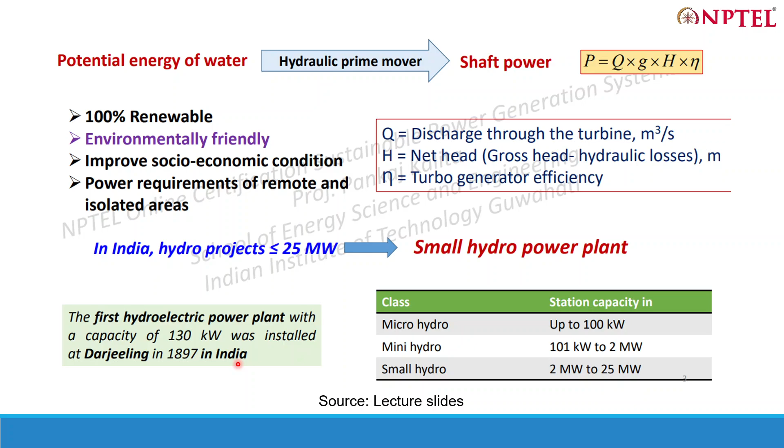Okay. So the first hydroelectric power plant, with a capacity of 130 kilowatt, was installed at Darjeeling in India. Darjeeling is a hill station in West Bengal. There you have a flow of water, so you can always build a hydroelectric power plant there to capture that flow and convert it to electricity. So, if you have any questions regarding this.

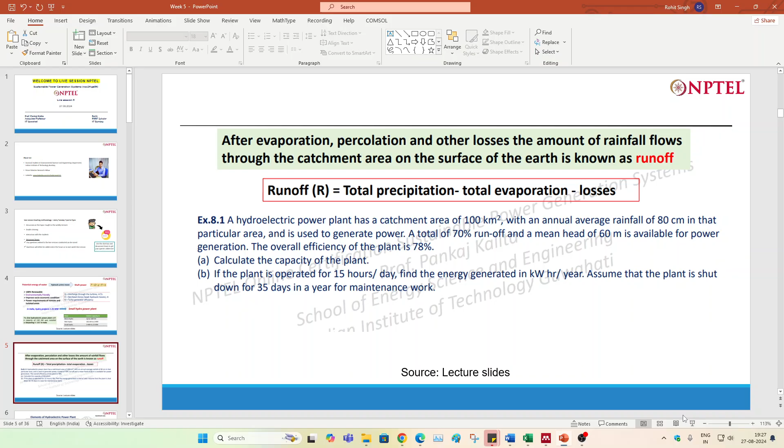So you need to understand that you have a catchment area of 100 kilometers square. This is in kilometers, so you need to convert it into meter square. And there is an annual average rainfall of 80 centimeters, so that also has to be converted to meters.

And then head is given, so you can easily calculate the capacity and total runoff. Total runoff will be this into this, and this is the actual precipitation, but only runoff is 70%; 30% is actually lost, like evaporation or other losses. So you calculate the water available for power generation.

So you must know why these extra zeros are there, to convert it into meter square, and then you multiply it with 80 by 100, that is also in meters, and then you multiply it with the runoff, 0.7. So you will get the value of q.

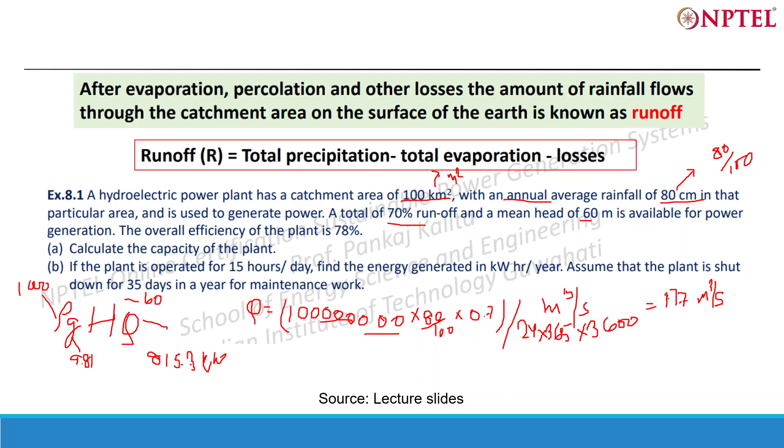Okay, that comes out to be around 815.3 kilowatt. Okay, so this is the capacity. Now the plant is operated for 15 hours per day. Find the energy. Assume the plant is shut down for, so in total the days of operation is 365 minus 35. This is the total days of operation of the plant,

and kilowatt is the power generated, and then you have to multiply it to get kilowatt hours, so 15 hours per day. So that comes out to be around 4.03 into 10 to the power 6 kilowatt hour. That is, this much amount of electricity will be produced if you have this condition.

A hydroelectric power plant has a catchment area of 100 kilometers square with an average annual rainfall of 80 centimeter. So this is quite a big unit, like 10 to the power 6, millions of units of electricity will be produced from this hydroelectric power plant. So this is the capacity of the power plant. So you can imagine the amount of electricity that can be produced annually. Okay, should I go ahead, or are there any questions regarding this?

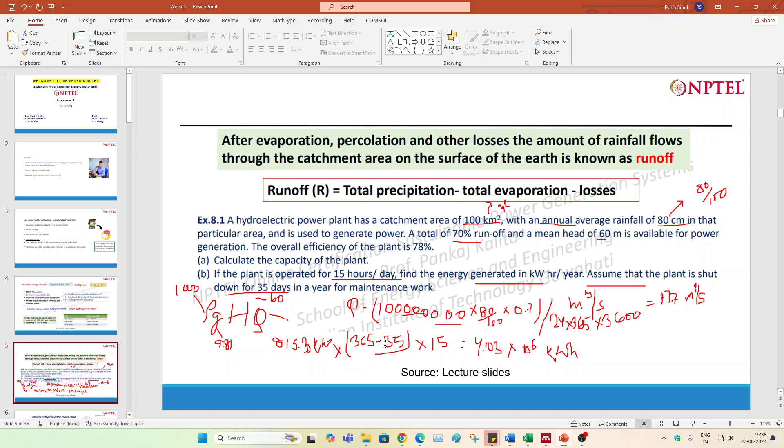And okay, so that's why I want you guys to actually have an approach to solving the numericals. What I see is that people generally don't go for the numericals in the assignment questions. They can look difficult, but these are not difficult. These are basically questions based on the basic concepts which you learn in the slides. Okay. Now moving to the elements of a hydroelectric power plant.

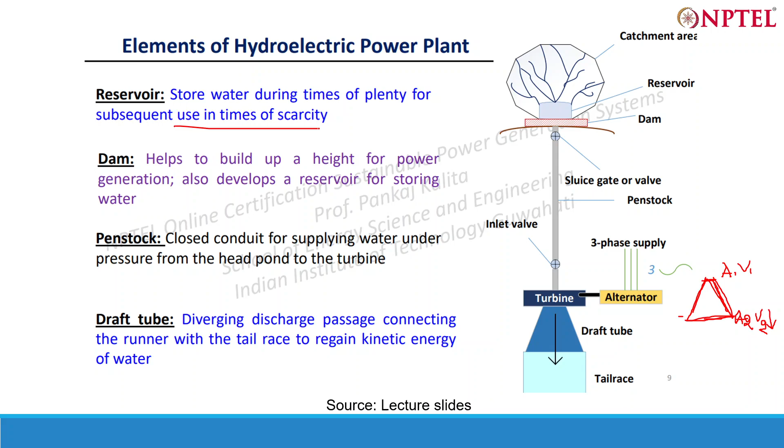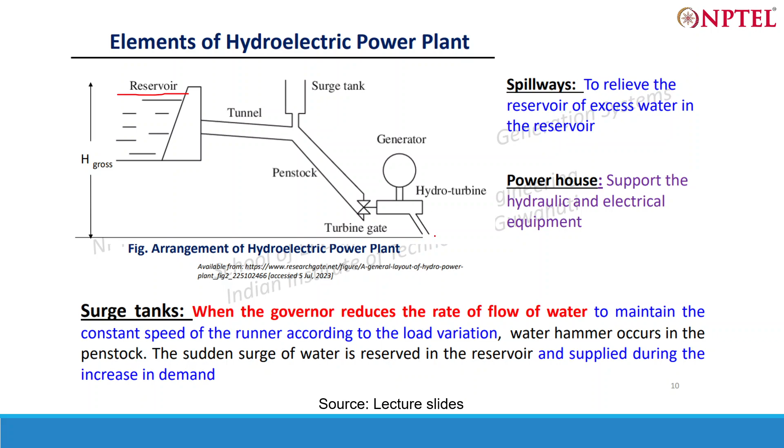This level is the headrace level. The water level here, and then there is a tail race here. So that has to be measured. This gross head is basically the difference between the headrace level here and the tail race level.

Net head is basically the head available at the inlet of the turbine. So it's Hg, the gross head, minus whatever losses are there, which have to be subtracted. The losses are given by FLV, FLV squared upon 2GD, that is flow through the penstock and other things, so that has to be taken into account.

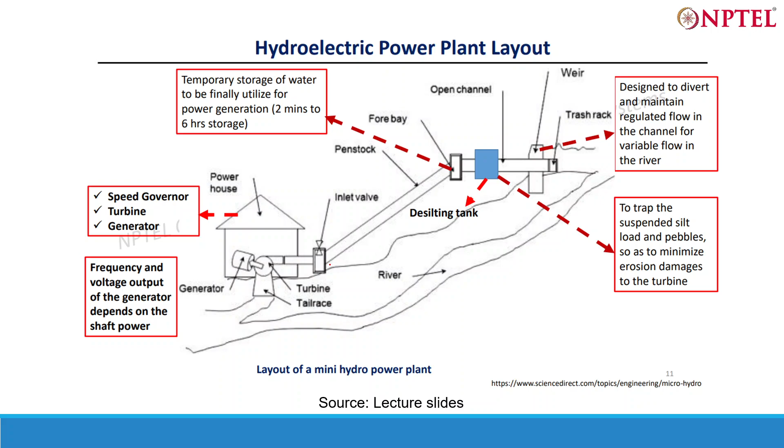Hydraulic efficiency is runner power by water power. Runner power is whatever power the turbine produces, and comparing it to whatever power the water gives gives the hydraulic efficiency. There are different types of efficiency in the hydroelectric power plant, so always try to understand which efficiency is being talked about. If no efficiency term is specified, take it as overall efficiency.

Mechanical efficiency is shaft power by runner power. So whatever power is generated by the runner, versus whatever is available at the shaft.

Volumetric efficiency is the volume of water actually striking the runner divided by the volume of water supplied to the jet. We'll see what this means in the later slides. Overall efficiency is basically shaft power generated, generator power, divided by water power. If you multiply ηh into ηm into ηv, you get the overall efficiency. You can also get it from here.

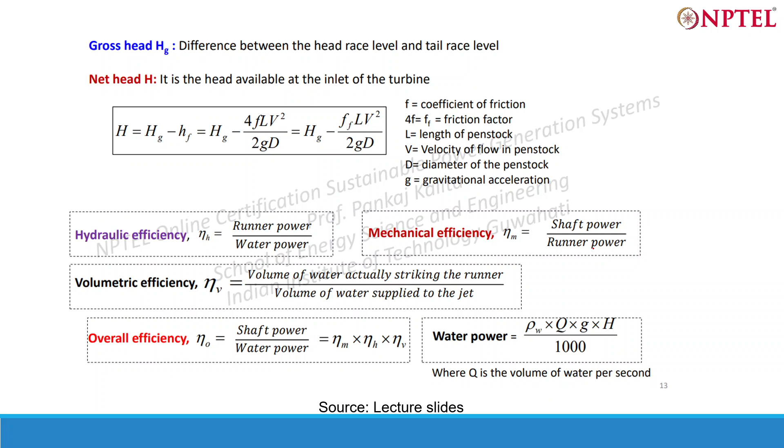Water power is basically rho g H Q, which we solved in the numerical, divided by thousand to get it in kilowatts. So solve this question. I want you guys to solve this question. Then we'll move to turbines, and then another question.

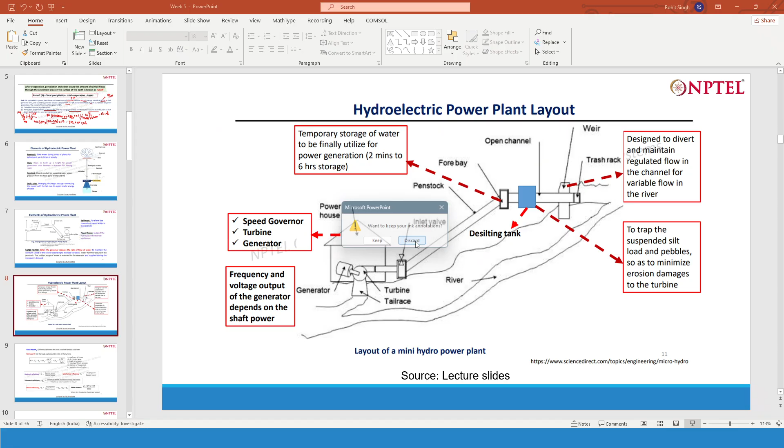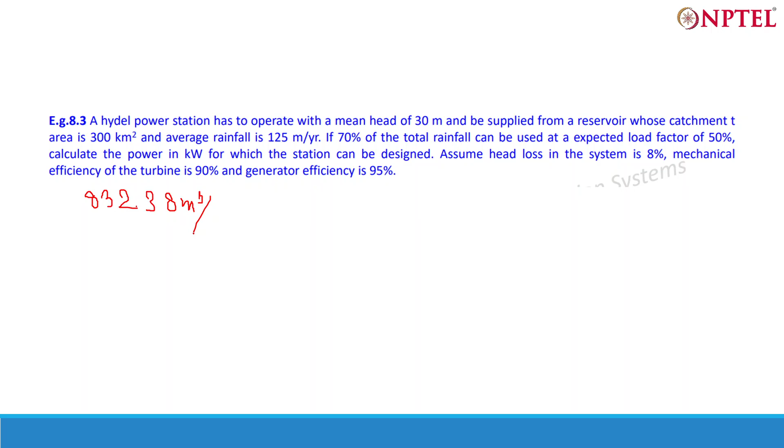So if you know the discharge, then I think everything is known. You have the load factor here, you have the head here. So rho G H Q into this load factor gives power in kilowatt — this has to be divided by 1000 for power in kilowatt. Assume head loss in the system is 8%, so it's 1 minus head loss, HL I can say. And then mechanical efficiency of the turbine is ηm and generator efficiency is ηg. Now just put the values and get the answer.

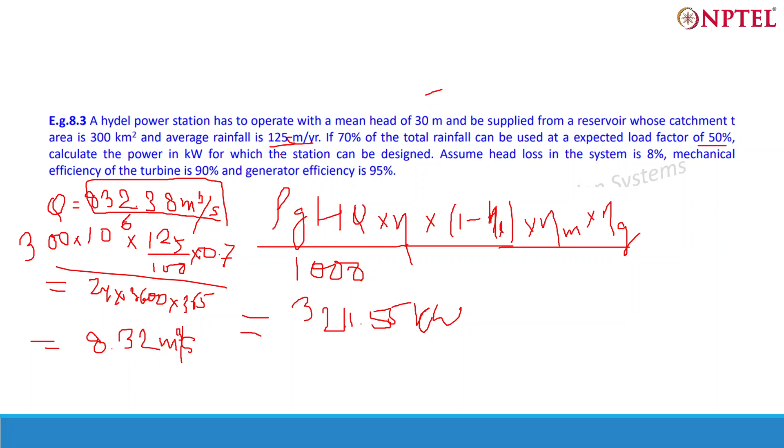Oh, they have made a mistake here actually. This is centimeter — 125 meter per year is quite a high rainfall, this should be centimeter. That's why I divided it by 100. This is centimeter, 125 centimeter. This is a wrong value in the question — 125 meters of rainfall is impossible. Rainfall throughout the year is generally measured in mm. Even 80 centimeter, 125 centimeter rainfall is quite high. Generally rainfall is like 1100 mm or something in a season, so in a year it can be 80, 100 centimeter or something. So yeah, this is centimeter.

Then rho G H Q — you have to multiply all these values to get the overall efficiency, and divide by the load factor here. This is overall — η overall is basically this into this, so this is not overall, this is head loss. The actual efficiency is 1 minus 8%, that is 0.92. So that will be the correct answer, 0.92. Okay, so is it done?

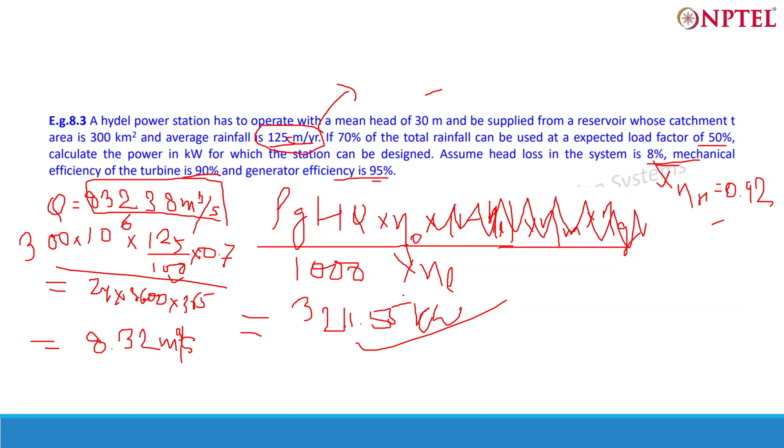Okay, then impulse turbine. I want you to have a look at whatever has been taught in this interaction session up to this point. If there are any questions, please feel free to ask so that we can have a good discussion. You guys can go through these slides and see if there's anything you want to ask, or any numerical questions that are quite difficult and can't be solved by you. So you can always ask. Till then.

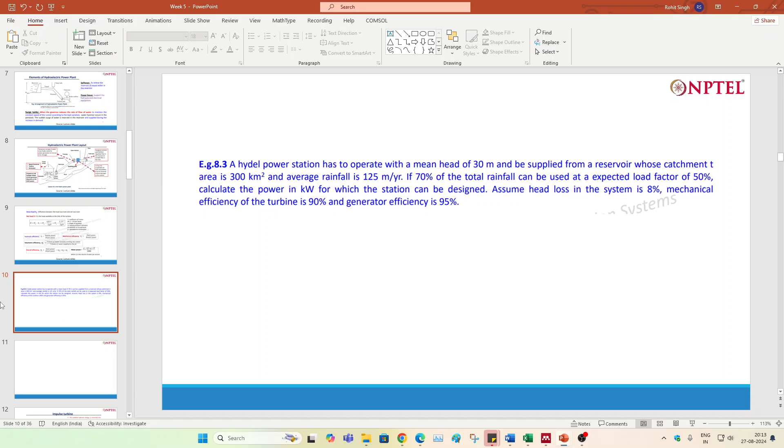I'm sure you guys must be getting the idea about how to approach and solve these types of questions, so most probably you'll be able to do the questions in the assignment. I think I should go directly to the quiz questions of the last run so you can have a good understanding, and if time permits I'll come back to the theory portion. Not much theory is left actually. What I wanted is, only impulse and design a Pelton wheel. You can do this question at home, design a Pelton wheel.

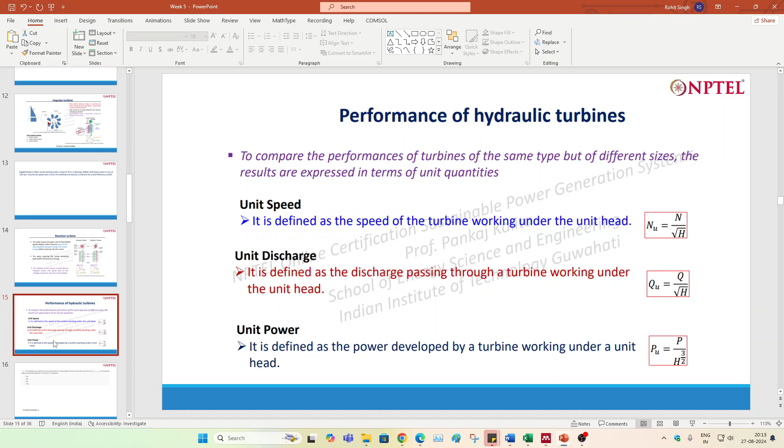Okay, so performance, now we'll go to quiz questions. These are very easy questions compared to whatever we just solved, so I want you guys to not miss any of these. I think this is a numerical question, just a numerical question. Let's move to this, let's remove this diagram. Actually this is from the previous wind turbine.

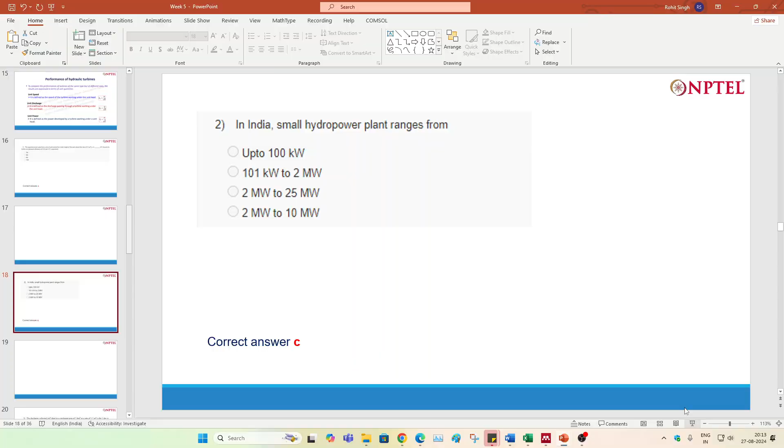In India, you should answer these questions. Small hydropower plant ranges... remember the first slide which I taught you guys, it ranges from 2 megawatt to 25 megawatts. So the correct answer is answer C.

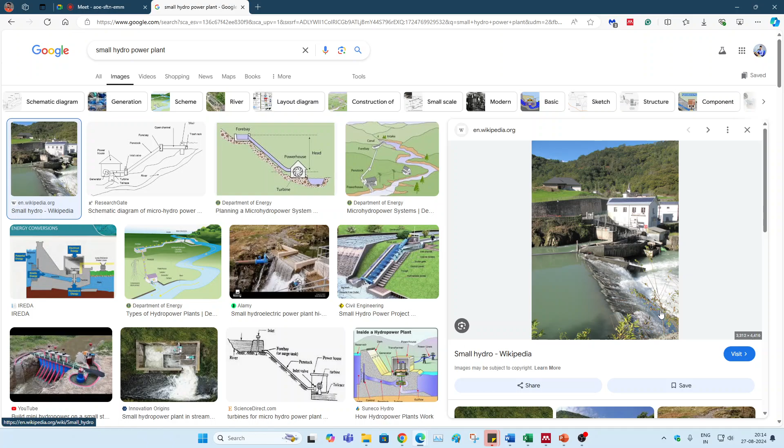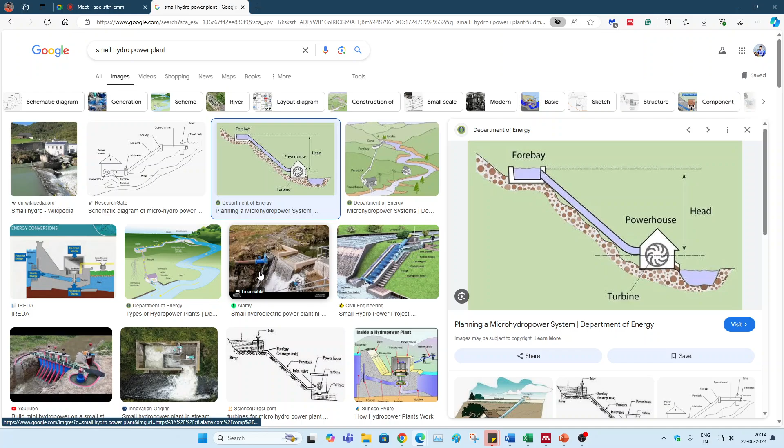Let me check if I can show you guys how small power plants actually look like. Small hydropower power plant. Okay, so do we have a small power plant here? This is a forebay powerhouse, so yeah, the forebay looks like this. The flow, the temporary reservoir is there, this is the penstock and this is the powerhouse. Okay, got it, this is one of a small hydroelectric power plant.

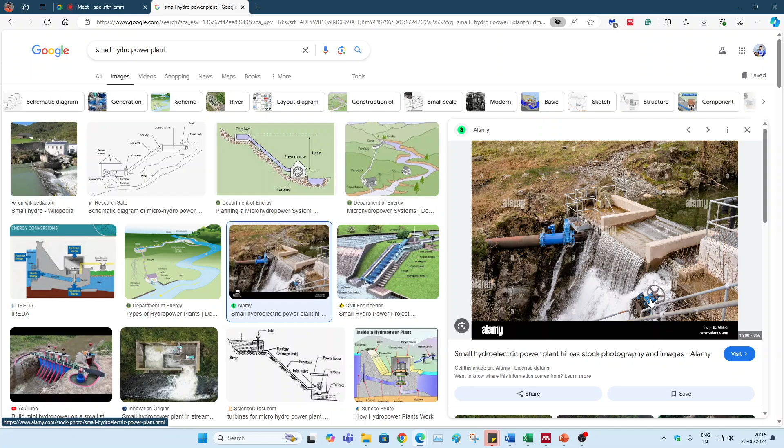So you can see this is not like a very big dam or something, not like what you see in Tehri Dam, Farakka Barrage, or in South you can see various big dams like Hirakud Dam, dam on Godavari, Narmada, Sardar Sarovar. These are very small, so they can be used to produce electricity. This is one example, kind of a front view of these small hydroelectric power plants.

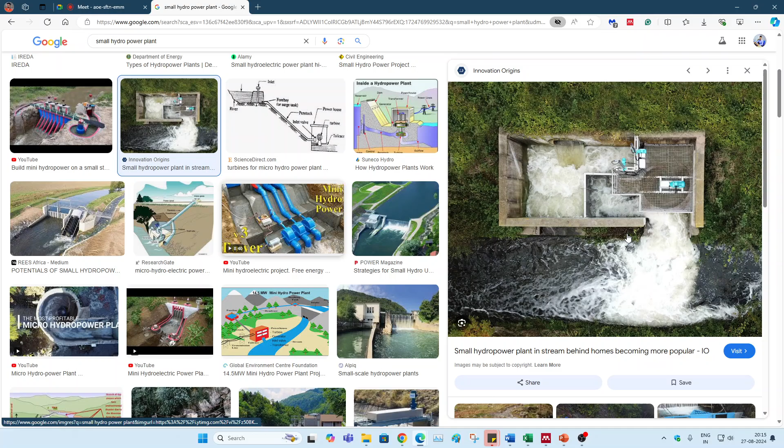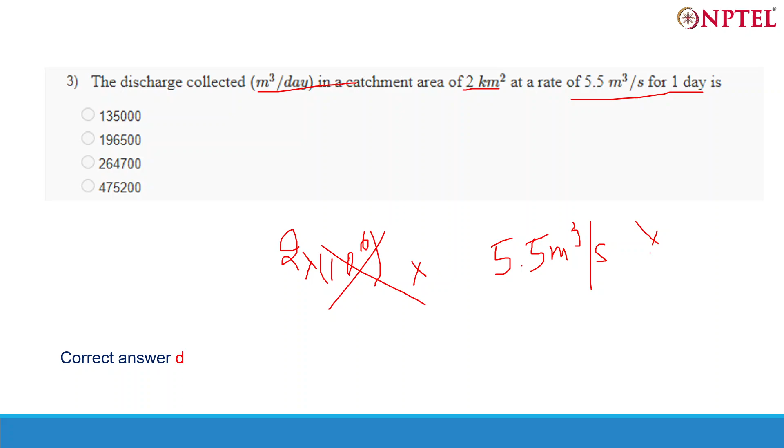I think you guys will be able to do this question, so let me do it for you. Discharge collected for... you have meter cube per day, discharge 2 kilometer area, so you need to convert it to meter square, 2 into 10 to power 6. But I think this is given for 1 day, so I think this is not needed actually. Discharge itself is given as 5.5 meters cube per second, so you have to collect it for 1 day, multiply it by 24 into 3600, not into 365, just 1 day. So 5.5... this gives 472500, okay, 475200. So this is the correct answer.

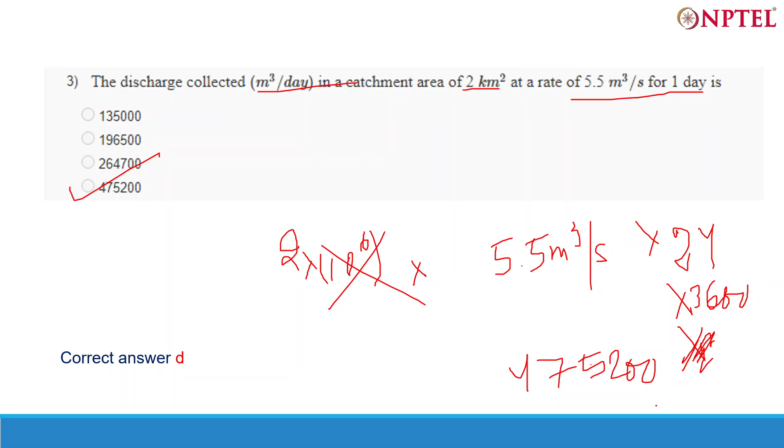Cavitation occurs when the pressure of the turbine is higher than atmospheric pressure - wrong. Water in the turbine leaks due to pressure difference - wrong. The pressure of water falls below vapor pressure in the turbine - this is correct. So the reason cavitation happens: it's a phenomenon that occurs when pressure falls below vapor pressure, so bubbles are formed, vapor bubbles are formed. These bubbles travel through water, and when they strike a high pressure zone like near the turbine or a solid surface, these bubbles actually get broken down. So whatever vapor pressure is released does have an impact on the turbine blades.

So erosion of turbine blades can be there. That actually has a very negative effect on the performance of the turbine also. So these cavitations should be avoided. Apart from that, it makes the turbine blade unable to operate freely or efficiently. So these turbine blades have to be changed actually.

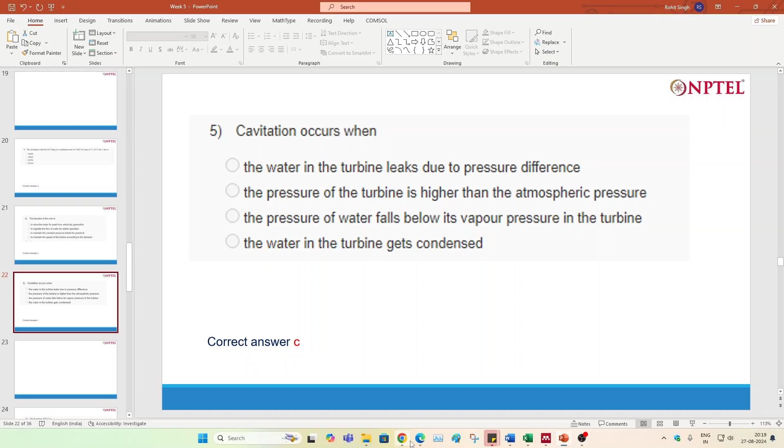So that's why we have a lot of studies, a lot of research going on to prevent this cavitation in hydroelectric. Not only is cavitation a problem in hydroelectric, but also in steam power plants. Cavitation is a big problem. So one example of cavitation which I can give, let me show you here itself. One example of cavitation is near the river course. Right.

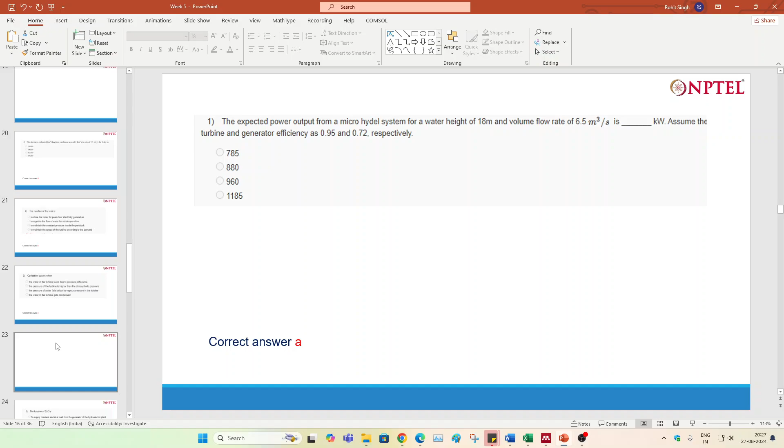Okay, so did you guys solve this question? Wait. Yeah, 785. Okay, Jayesh has said 785 is the answer. So yeah, that's the correct answer. So it's basically rho GHQ. You have to put the values and multiply it with the generator and turbine efficiency. Okay. So what are the next questions? Six we have done.

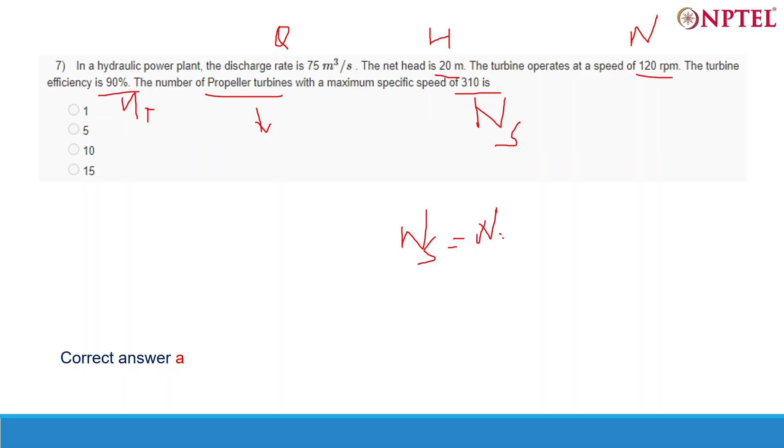So you know the formula, Ns equal to N into root P upon head to power 5 by 4. Okay, so you know Ns here, you know N here, you know H here. So you will get a P value from here, and another P value you can get from rho g H Q. That is the power in the water itself.

So you will get power from turbine and power from water. So you divide this from this, so you'll get the number of propeller turbines that can be installed here. So use this formula. Tell me the answer correctly.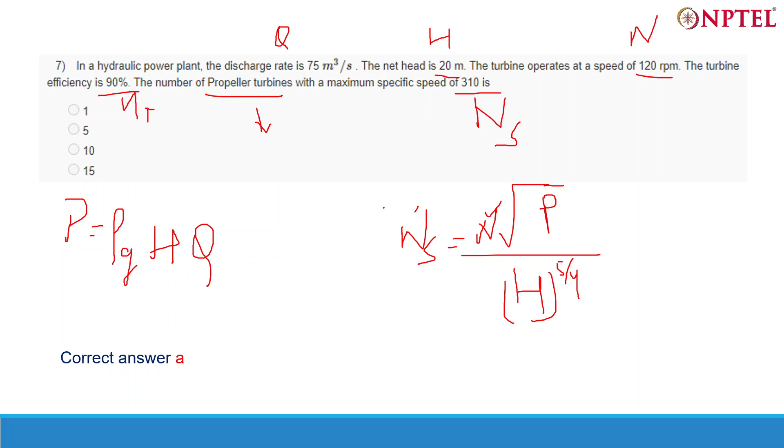Okay, guys, did you solve it? Let me see if you guys are able to solve it. No?

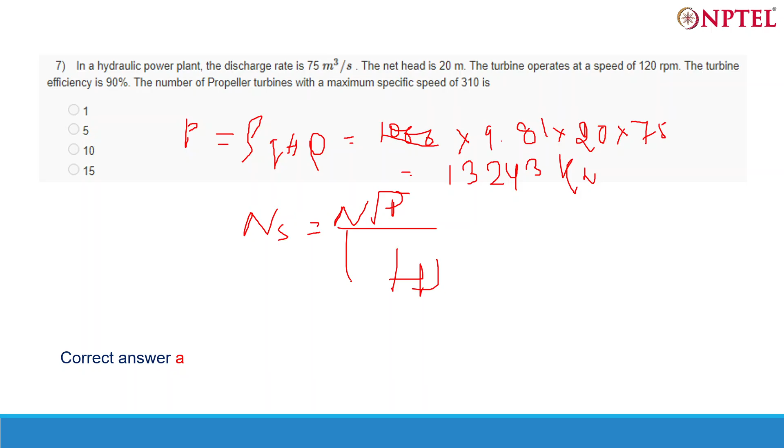Okay. And then another one is Ns equal to N into root P upon H to power 5 by 4. So you get a power from here also. Ns is 310, equals 120 root P upon head 20 to power 5 by 4. So this comes out to be around 310 on 120 and 20. Okay, and then you square it. That is 11938. Okay, this is kilowatt.

Now this is the power in the water. This is power produced by one single turbine. So now you want to know the number of propeller turbines. So just divide it. So this comes out to be around 1.1 or something. 1.1 I guess. So that is something around one turbine. Okay.

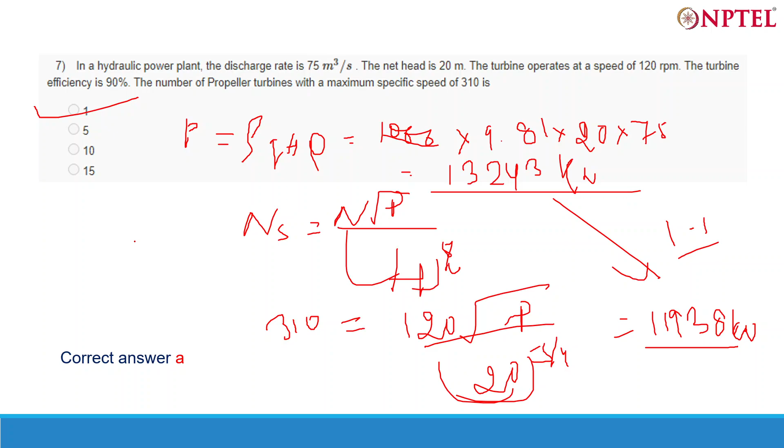So this is how these type of questions are solved. So you just have to put the formula. You just have to apply a trick, like just understand what the question is asking. Then you will be able to do it. Okay.

Question 9. Calculate the specific speed of the turbine which produces this power, this RPM, this meter head. The specific speed Ns equals N root P upon H to power 5 by 4. You need to calculate Ns. N is given, P is given, H is given. Okay. So calculate it, guys, and check if whatever you are getting is actually the same answer on the slides.

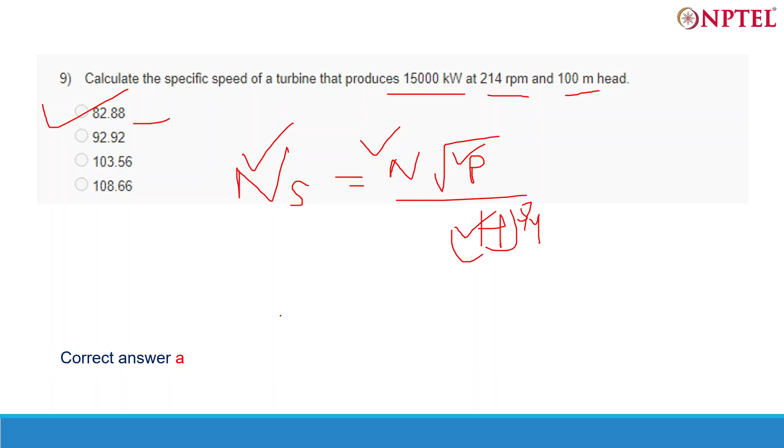Answer is 82 point. You got the answer? Okay, so I think you got the correct answer. Then this is the correct answer. Okay, so now you guys understood. You just have to apply the formula and get the answer. So these type of questions can be easily done. So don't panic from the question, just understand what the question is asking. So this is one of the good questions I would say, and this is a normal kind of question. Just put the formula and answer this.

Okay, now this you have to do. I think this question was done when I was talking theory things. So this was one of the questions, like average capacity available for power generation in meter cube per year. So it is asking in meter cube per year, not in meter cube per second. So this you can easily do.

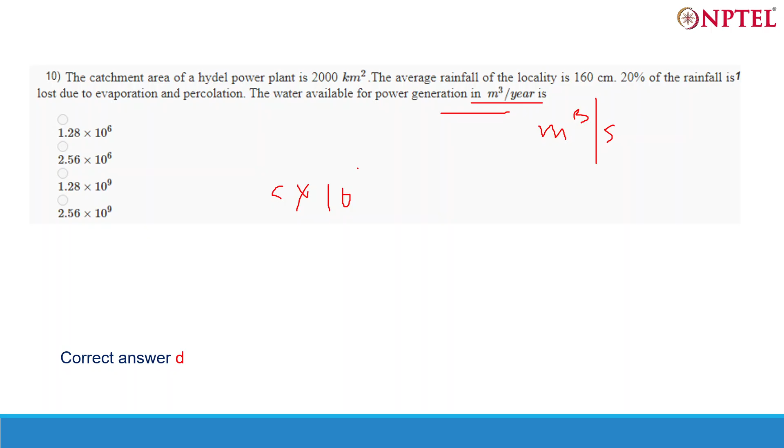Okay, so what you have to do, catchment area into 10 to power 6 meter square, and then this average rainfall, let's say R upon 100 to convert it into meter, and then 20% is loss, so 0.8 is what you are getting. Okay, and then you don't have to divide it by 365 into 24 into 3600, because the average rainfall for the locality is generally for 1 year. Okay, so calculate it.

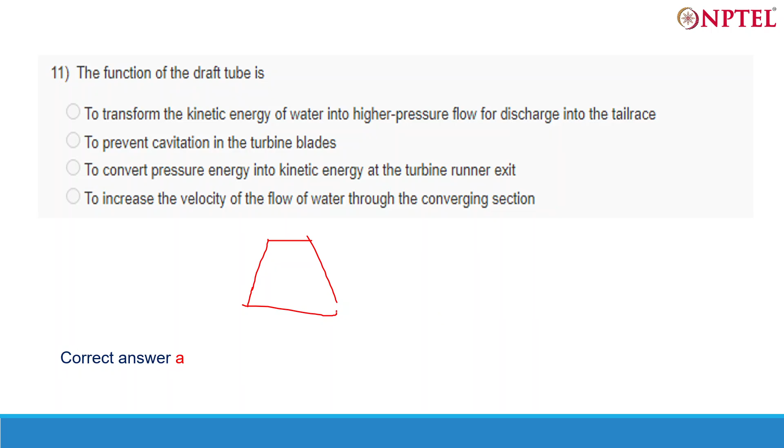So this is the draft tube. What happens, this one is the A1 area, this is A2 area, the velocity here is V1, and this velocity here is V2. So area is increased, so this is less area, this is more area. So due to continuity equation, A1 V1 equal to A2 V2. Okay, so velocity has to match it. So velocity will be more here, less here.

So if velocity is decreasing, then kinetic energy, 1 by 2 mv square, will decrease. Then that kinetic energy will transfer to pressure energy. So there is high velocity low pressure here, okay, and low velocity high pressure here. So the correct answer is to transform the kinetic energy of water jet into high pressure flow for discharge into the tail race. Okay.

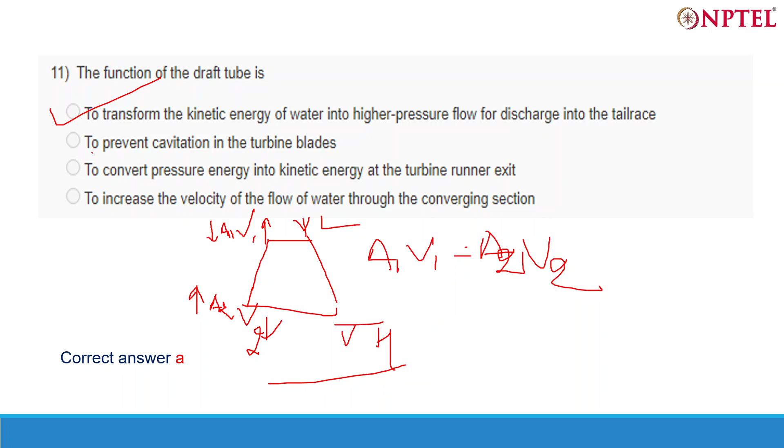Yeah, sure. In the turbine blades, yeah, correct. Actually, it does help in preventing cavitation in the turbine blades, and this option is also right, I won't say wrong, but the major function of draft tube, if you see the function of the draft tube, is to actually convert the kinetic energy of water to the pressure energy. But because of this conversion, it also helps in preventing the cavitation of the turbine blades. Advantages of draft tube. Okay, so it is not a function, it is advantage.

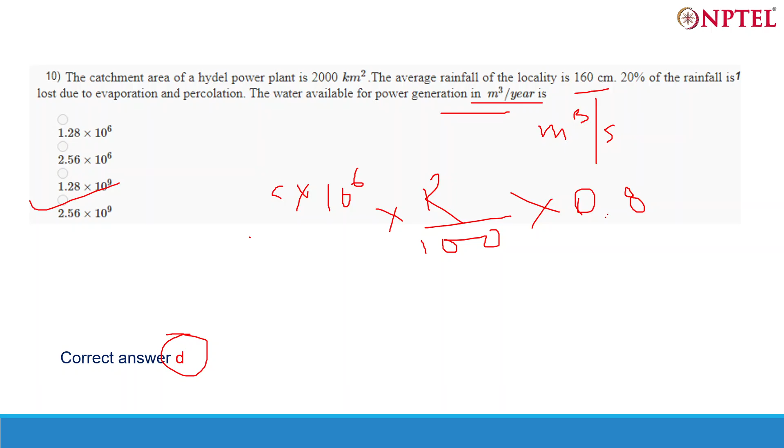So I think almost all the questions are done. Yeah. Any questions from the quiz remaining? This is also done. This is also done. This is also done. So I think all the questions are done here for the quiz. And if there is anything which you want to ask, I think 10 minutes are there. So if any question, anything which you cannot understand, please feel free to ask now.

Same. In final exam also this type of question will be asked. Okay. So where do you have your job? Okay. So that's a good thing now. So you are brushing up some new things and having expanded knowledge about this. So don't worry. Okay.

Yeah. Okay. So if you go through these quiz questions and try to solve them by yourself, I think most of the exam questions you will be able to solve. And then we have this interaction session, me and Kapil are conducting on Fridays and Tuesdays regularly. So we try to solve these previous year quiz questions so that you guys can have a familiarity about how these questions have to be approached.

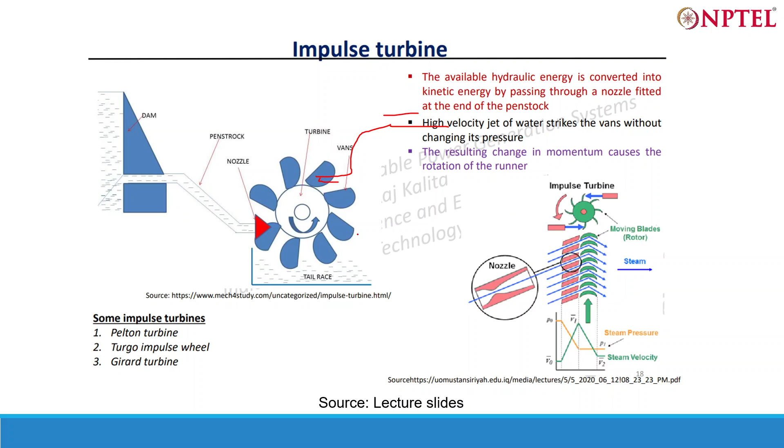Okay. These are moving rotors. So these move and then the electricity is generated. So one is this single movement, like single phase strike, or maybe there is water flowing from here also, that also strikes here. So there are different types of impulse turbines. Okay, so this can be a Pelton wheel. That wheel which I was talking about, the water wheel, is called Pelton wheel.

So reaction turbine. We remember this impulse turbine: a water jet strikes the blades and it creates an impulse that moves the blades in a rotary direction. But in reaction turbine, what happens? It is something like this. There is a rotor and the water is there. If something is pushed at a very high velocity, then it will have a negative force because of Newton's law of motion, that any action will have a reaction. So on similar laws, this reaction turbine actually works.

Okay, so these reaction turbines are of two types. Not two types, actually. You can say Francis turbine is a type of reaction turbine, and similarly we have Kaplan, and I think these are not in the slides. So Kaplan and axial turbines are also there. Axial moving turbines are there. Okay, they also work on those concepts.

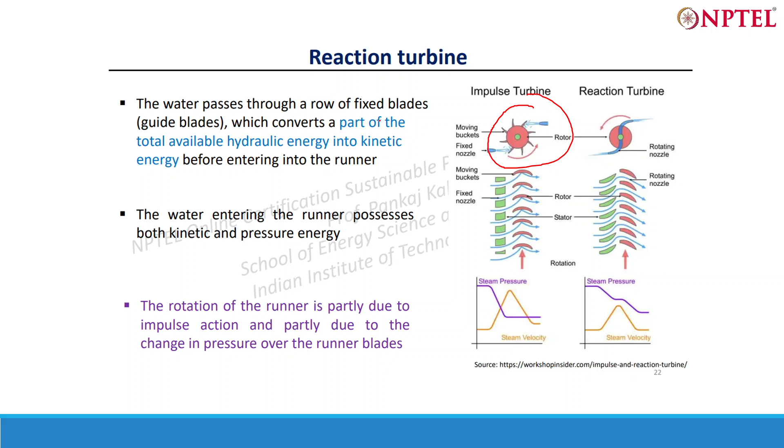Then there are performance parameters. When you are talking about turbines, there are some performance parameters, like speed, discharge: how much is the speed at which the turbine moves, how much is the discharge that it can handle, and then how much is the power produced. This is the main criteria. When you are talking about the performance of hydraulic turbines, these criteria have to be taken into account.